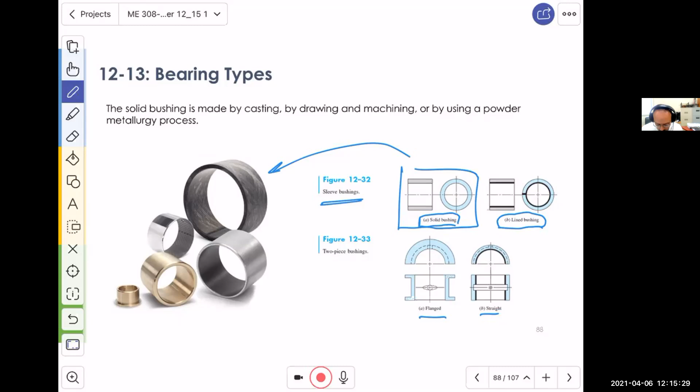I spoke about that sleeve here, but maybe I should speak about it on the next slide, which is when we talk about the lined bushing, where we have this cut over here. The Starbucks sleeve has a cut, which kind of clamps to hold itself. In this type, I have added some text explaining how these bushings are made, by molten material formed into a thin strip, then butted together. Of course, such a cut, like a groove, is probably intentionally made to facilitate oil - so this is like a grooved opening.

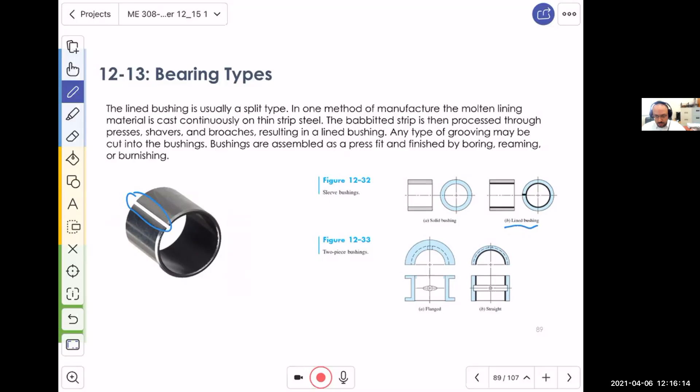And the most famous of all, I would say, is this guy. I think if you go to any machine shop around, the closest one being the Aramco Dhahran machine shop, if you happen to be there, you'll find the straight, two-piece type. This is the other category, the two pieces bushing.

If you go to that machine shop, you will see that when they receive the equipment, they will dismantle the casing, the top part of it, and then the bearing will be exposed. There are some screws on the side. They will unlock the screws, and then take half of the bearing from both sides. Then they will hook the rotor - the rotor is basically the shaft with everything on top of it, blades, impellers, you name it. And then they will pick up the lower part and clean them, maybe replace them, do whatever you want.

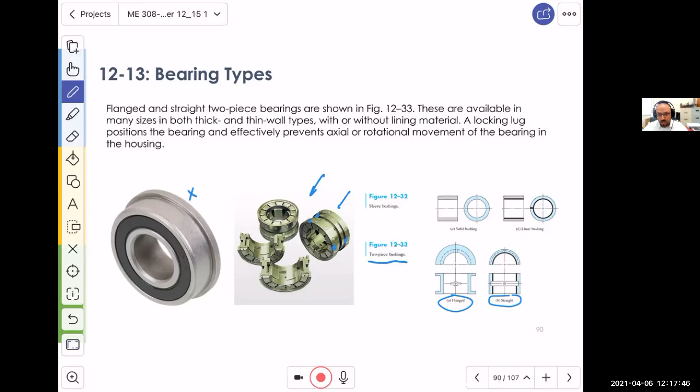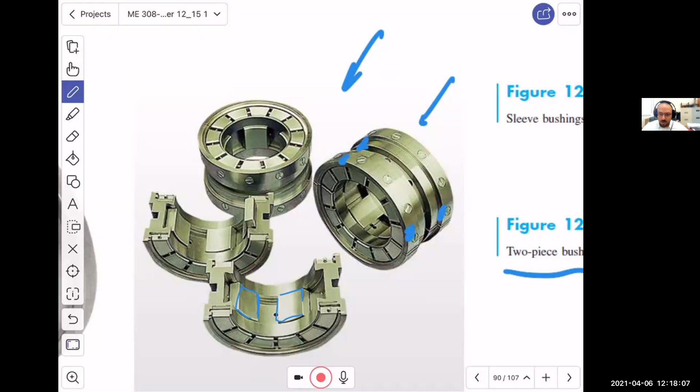If you zoom in here, you will interestingly see the pads, right? So these are the guys that are basically carrying everything. This is where the thin film, the lubrication, Reynolds equation, temperature - everything we did, all the mathematics and design - is happening. Okay, interesting. Now let's move on.

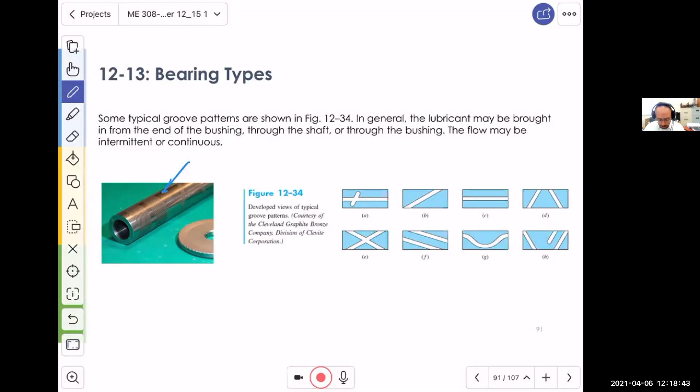This type of bearing, where you see the journal or the bearing has some grooves to facilitate the distribution of the lubricant - I honestly haven't seen it before, but it is there for you to see. If you zoom in here, you see that there are very thin grooves. These grooves basically facilitate the distribution of the lubricant all over.

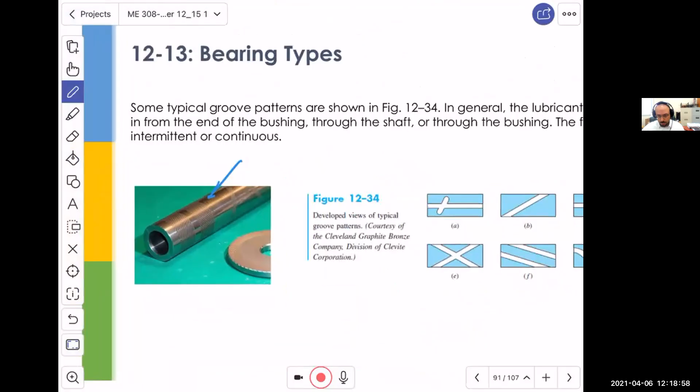Okay, now what are we going to talk about? Is this...

Have you ever thought about something which is, when we studied bearings, like the roller contact bearings, we spoke about thrust. And actually it turns out that thrust is this unavoidable force which you can deal with.

You remember we had the arrangement to put two helical gears against each other in a way to cancel out the thrust, and we said in other situations we can have a thrust bearing. So we talked about the groove bearings handling thrust, and tapered roller bearings handling also the thrust.

But with journal, this little nice cylinder, you can imagine that you can just float in the axial direction. So what is going to stop you? One way is to have, with the same logic, a thrust bearing.

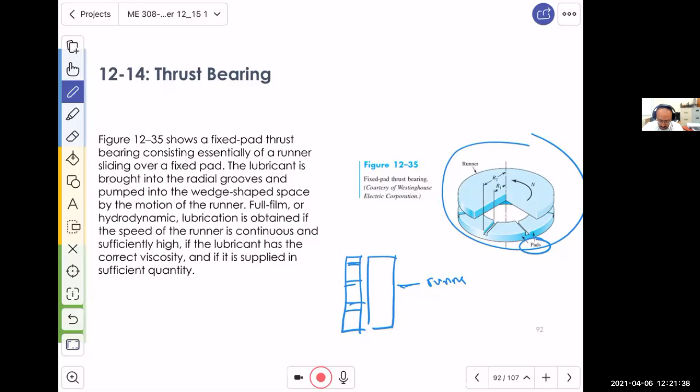Well, this is very interesting. So you can just, if you ensure that there is lubrication, then you are going to be basically having a thrust bearing. But you need to be very careful.

Now I know this may sound a little boring, but I'm going to read this note for you. Okay, so just watch out with me. It says we should note that bearings are frequently made with a flange, as shown. So what is a flange? It means that you have here this side. I'm trying to highlight it with the green.

Green is very light color, so maybe I put a red over here. See that part? This is like there is a flange, and then the shaft is pushing against it. Now the flange positions the bearing in the housing, and also takes care of the thrust load.

Even when it is grooved, however, and has adequate lubrication, such arrangement is not theoretically a hydrodynamically lubricated thrust bearing. So, if you remember...

Back in the first class of this chapter, we talked about the category, right? And we said we have hydrodynamically lubricated bearings, we have boundary lubricated bearings, and we said that these two categories are different. Now, the reason for this is that the clearance space is not wedge shaped, but has a uniform thickness.

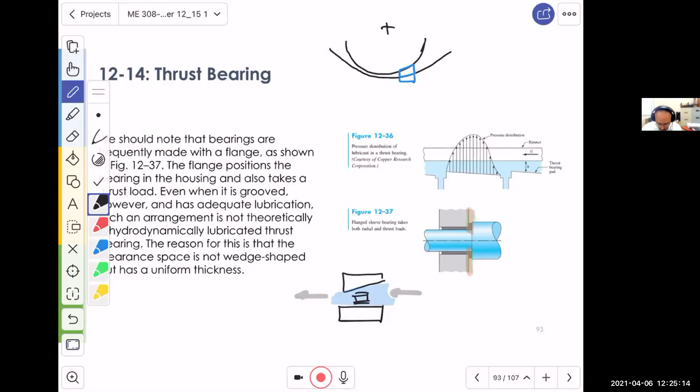But in here, what we have is a true, most likely, a boundary lubricated bearing. And just to remind you about the boundary lubricated bearings, we showed you - if you go again to a few slides later - this is a very exaggerated view of the surfaces of, let's say, the pad and the bearing, or the journal and the bushing.

So what we said there is a layer, a boundary layer of the lubricant sticking here. This layer is always there, and in between we have lubrication. This is what we have, a hydrodynamically lubricated system. And this is a flowing, and there is a wedge, and there is a pressure difference, and so on.

But also, if you go back, we told you that with boundary, we have something like this, and the line here, you see where the boundary lubrication exists is very thin, and there are a few gaps where I can try to fill them with a little oil, very little. So metal to metal contact becomes a concern. Yes, and it says here, when two surfaces slide relative to each other with only a partial lubricant film between them, boundary lubrication is said to exist.

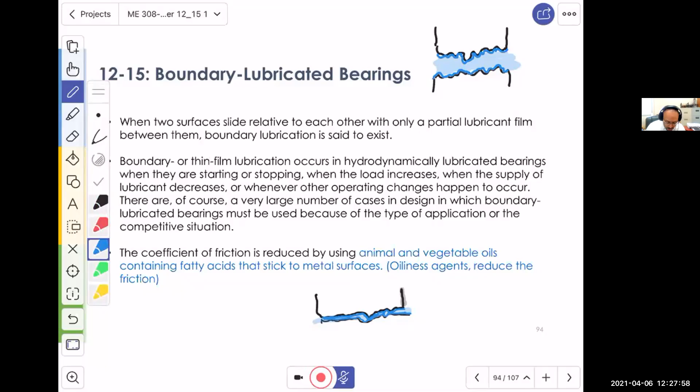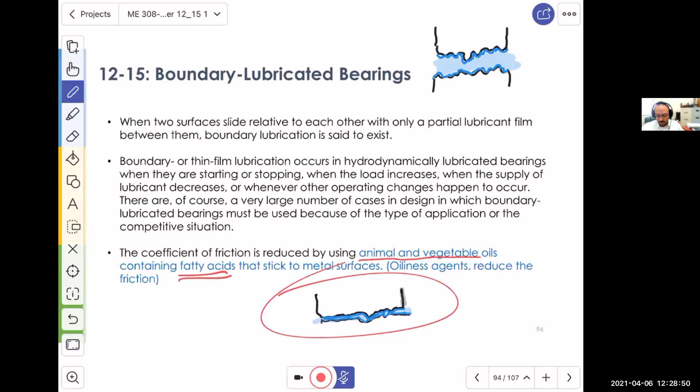You would say you probably will never avoid some touches between the two metals. So what people did, after some studies, they understood that animal and vegetable oils are actually helping. They have what is known as fatty acids. These fatty acids stick to the metal, fill those little asperities and gaps, and help reduce the friction. But you should be careful that these fatty acids dissolve or disintegrate whenever you reach a temperature of about 250 degrees Fahrenheit. And that's not a coincidence. That number, we know it from Timken recommendation. So it makes a whole lot of sense now.

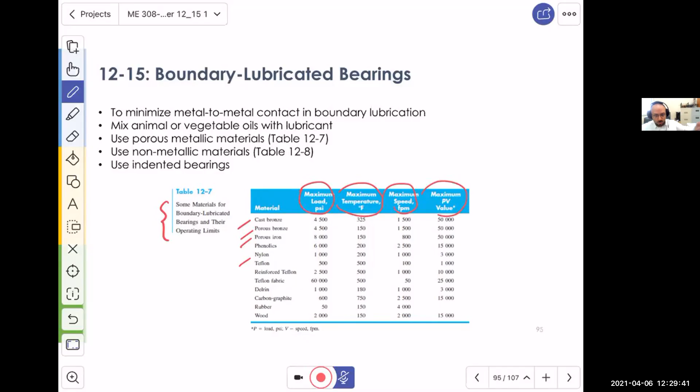So what you can do is basically minimize metal-to-metal contact by mixing the oil, the lubricant, with animal or vegetable oil. You can use porous metallic material, non-metallic material, and so on. So here we have some materials for boundary lubricated bearings, like cast bronze, porous iron, and so on. Some of them even non-metallic, like nylon and Teflon. What we have here is maximum load capacity, temperature, speed, and the product PV, which we will make sense of in a bit when we talk about wear in advance.

This slide should come after the next one, so I'm going to rearrange this and post it on the blackboard. So what we're interested in now is this. We spoke about thrust bearing, and we said that it is mostly flat, but in reality, as per the material, we are not going to have design problems which need a thrust, where this is two discs close to each other. This is not something we are going to discuss.

But the concept of wear is very important. Why? We just said that a hydrodynamically lubricated system, which has a thick film, can encounter boundary lubrication in starting, stopping, increasing the load, and so on. And this means that there is wear. There is metal-to-metal contact. So the purpose of the coming few sections, I think two or so, is to study wear. Now, wear is the removal of material by some process through friction.

So if we would want to establish some basic foundation to study wear in the material, we came to a very simple example. I found myself facing a hard time recognizing this figure. Somehow I think they should have made it this way, but I assume they wanted to show us the surface underneath, and that's why they plotted it this way. So let me explain. This is the bottom surface. This is the front, and this is the side. So what you imagine here is this: imagine in a simple way, a small rectangle, no big deal. That's how we usually do it.

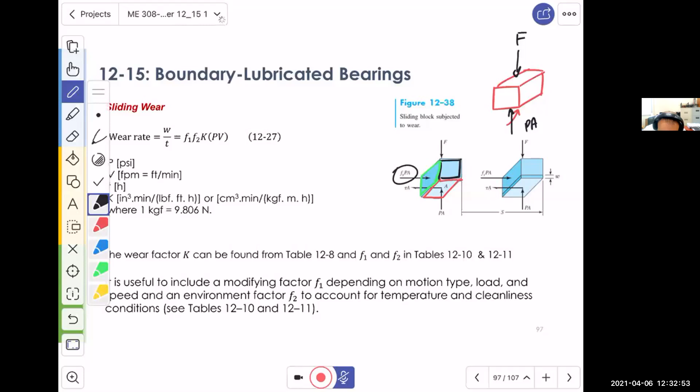When we apply a force over this block, and there is a surface underneath it, then we know that there will be an opposite force, which is equal to the pressure generated multiplied by the area, the projected area. That's just a reaction. Now, if you happen to push this block while the force is there, then due to friction, that force is going to be equal to Fs, the sliding friction, multiplied by the pressure multiplied by the area. And you will be opposed by a shear stress tau A, correct?

Now, if you slide this block a distance S, some material will be removed, and that removed material, in terms of thickness, is designated as W. Now the question is, it doesn't matter whether you want to know this removal rate, which is expressed as the wear rate, or you want to know how much wear, how much you are losing.

So if we just imagine that I want to know how much I am losing per unit time, which is hour or whatever, then it is W divided by T. It's a rate, that's why there is a time here.

And then we have two modifying factors, not coefficients of friction, I'm sorry. The first one, F1, depends on the motion type, load, speed and environment, while F2 accounts for temperature and cleanliness. How clean is this and what is the temperature?

Okay, K - if you look at the unit of K here, it is inches cubed, so that's unit of volume, multiplied by time, divided by a force, pound force, distance, feet, hours. You would imagine that this is a measure of some sort of how much is being removed.

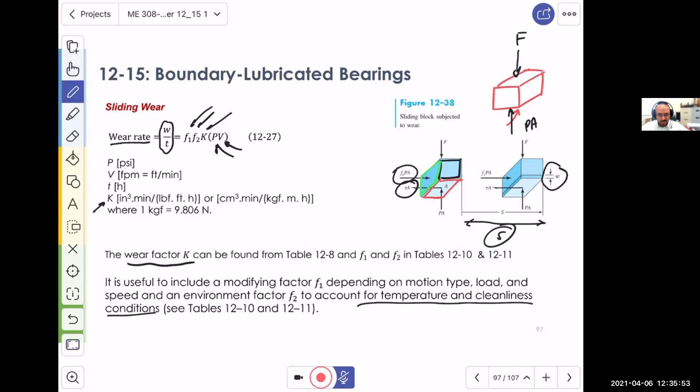And then we have P, which is the pressure, by V. These two seem to be very relevant. I mean, come on, if you put the block lightly and then you start moving it, you will feel different. If you put it lightly and you move it fast, you will feel different, you will get different result. If you push it too hard and slowly, you will get something different. And if you push it hard and you slide it too fast, you will also get something different. So these two has to be there.

So the P is the pressure in PSI. The V is the velocity or the speed, feet per minute. T is the time in hours. And we just explained K, which is usually described in centimeter cube minute per kilogram force. Kilogram force, 1 kilogram force is equivalent of basically 9.806 Newton meter hours, that's the unit.

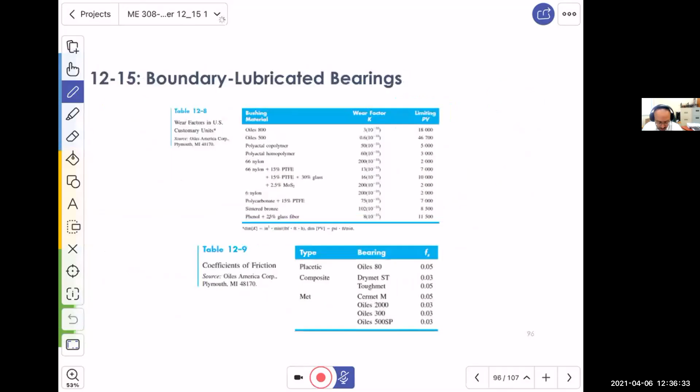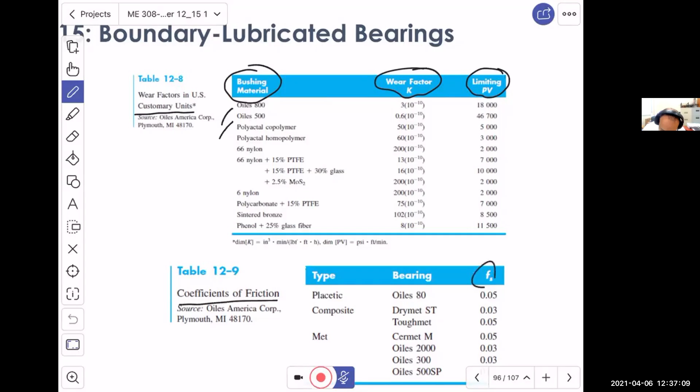Now, if we go back, you will see some materials used for bushing - this is the bushing material. This is Oiles 800, Oiles 500, nylon, polycarbonate, and what is their wear factor? This is in US customary units, okay. And this is the limiting PV, which is there is a limit by which you can combine this pressure and velocity. And of course, the coefficient of friction Fs is given here for different materials as well.

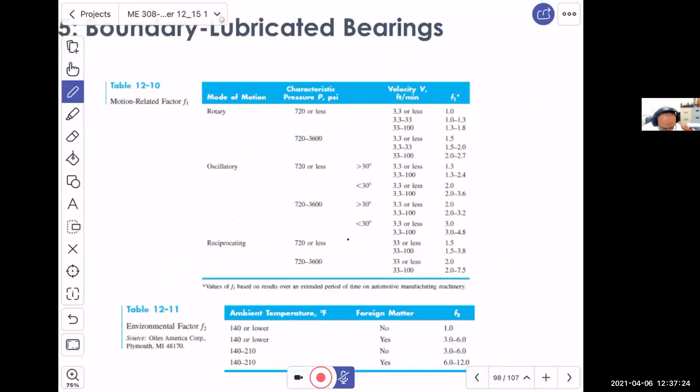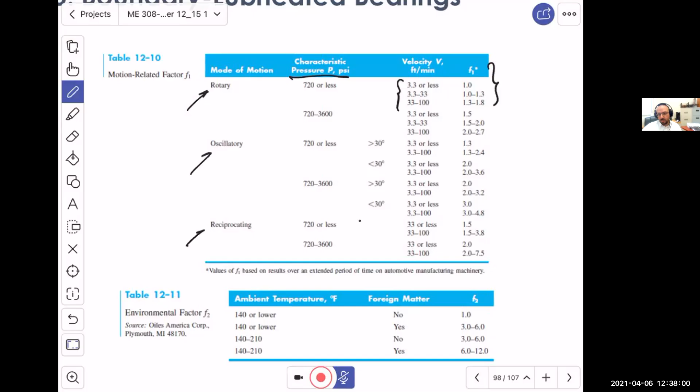Okay, now what are F1 and F2. Let me just zoom this out. F1, which is the motion related factor, since it is motion related factor, you should expect that there are some categories. So we have here a rotary motion, we have an oscillatory motion, and then we have a reciprocating motion. And we have a pressure, so we need to know what pressure, and of course what is the range of velocity, and F1 - for most part is not one number, so it is more of a range, okay.

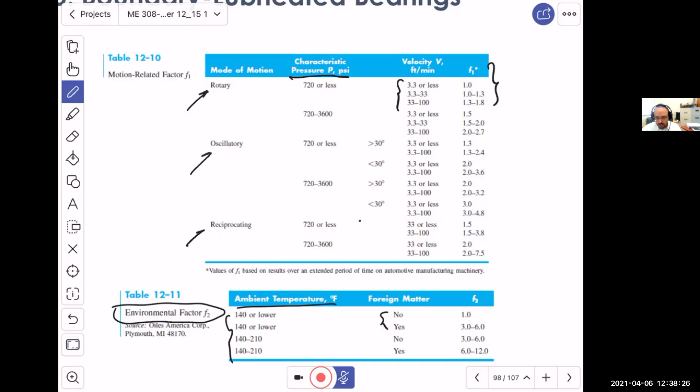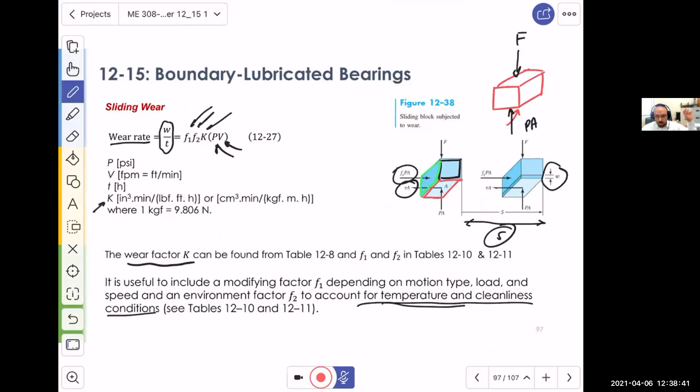And then we have the environmental factor, F2, which is given for what temperature below or above, and if there are foreign matters. So if you're expecting dust to go in and so on, you need to take that into account as a foreign matter. Why? Because we said that this is dependent on the cleanliness and the temperature. So the cleanliness is more related to what are the possibilities of having a foreign material getting into the system.

So if we want now to establish a neat relation for what is supposed to be a wear, we want to now study wear. Why? Because it is unavoidable, period. So don't be a coward and say, oh no, no, no, it's not going to happen, and you just deny it. It is there, so you better deal with it.

So we will here consider a pin. Now, just to tell you why do we consider a pin - we are establishing the wear relation for a cylindrical geometry, not like the flat, two discs against each other. This is just to tell you. Now, so we will have a pin.

This is a pin with a diameter D and length L. So this length is L. And of course, this pin is rotating with a speed N. You see that? And it has been subjected to a force F.

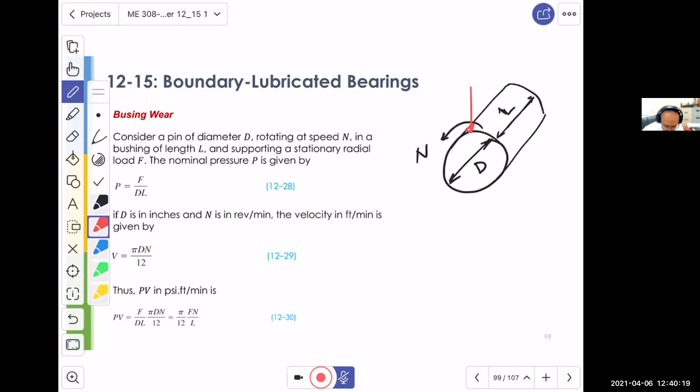Now imagine that this guy is rotating in a bushing. We are assuming that this pin is sitting on a half wedged cylinder. And then, what is the pressure?

Well, starting easy, we don't know the distribution of the pressure, so we will take the nominal pressure. What is the nominal pressure? It's the projected pressure, or the pressure generated from the projected area.

How is that calculated? You assume a projected area which has a diameter d as width and a length L, and that force generates a stress P equals F divided by the area, which equals F over dL. That's the nominal.

Now, if we assume velocity is measured in feet per minute, diameter in inches, and n in revolutions per minute, then velocity equals pi dn divided by 12. Remember, whenever you have feet and inches together, that 12 comes in because you need to convert—1 foot has 12 inches.

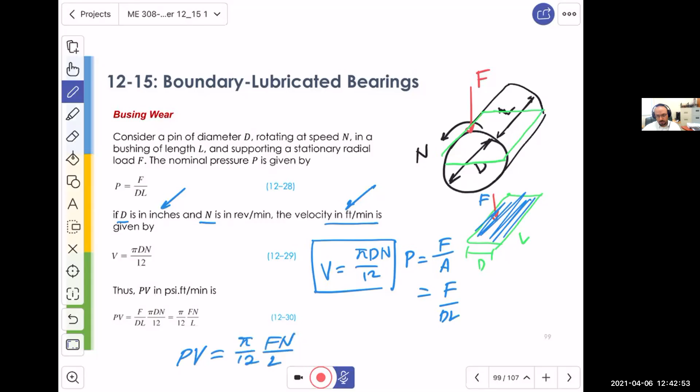Now, let me bring this example from 307. Do you remember when we said if you have a shear force F acting on this surface, then tau equals F over A, where A is this area? What you're actually doing is saying you get a stress represented by a flat rectangle, where everywhere on the surface tau has the same value—50, 50, 50, 50 everywhere.

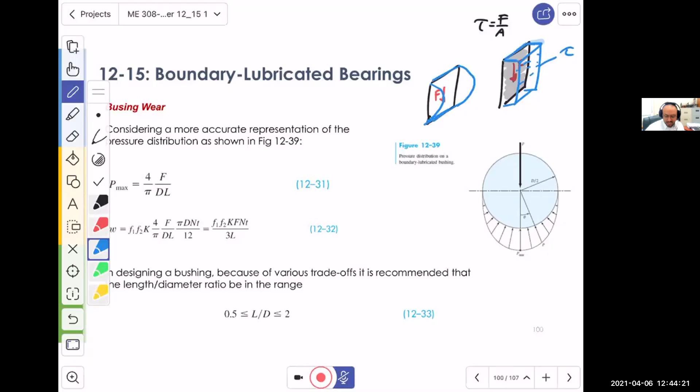But be careful—this is the average. You take the force and divide it by the area. In reality, the accurate distribution looks different. When that force F acts on the gray area, the distribution is like this: it's zero in some places, not zero in others, and has a maximum value that can reach maybe 80 megapascals, while the average is always 50.

When you push that, you actually generate a distributed pressure. And it turns out, if you do the experiment, you get this pin having a pressure distribution like this, with one point having P max. Mathematically, the only way to describe this, going around a circle, is some sort of integral from 0 to pi to find how the pressure is changing.

This has already been done, so I'm not going to derive it here—go read it in the book. But it turns out that P maximum is similar to tau maximum, which is... I forget, either 3 over 4 or 4 over 3 times V over A. Something like that—the maximum value equals F divided by dL, the average, multiplied by 4 over pi, which is greater than 1, so it amplifies the average a little bit.